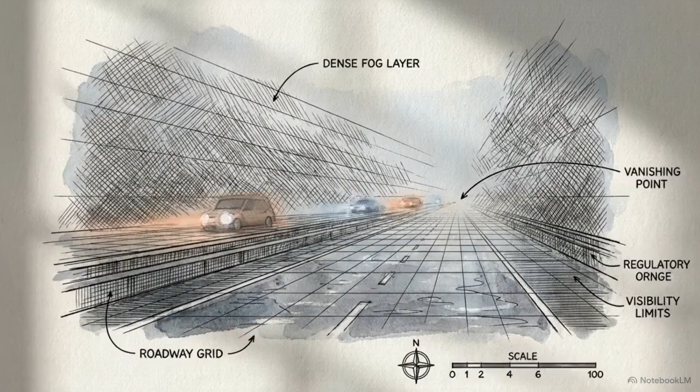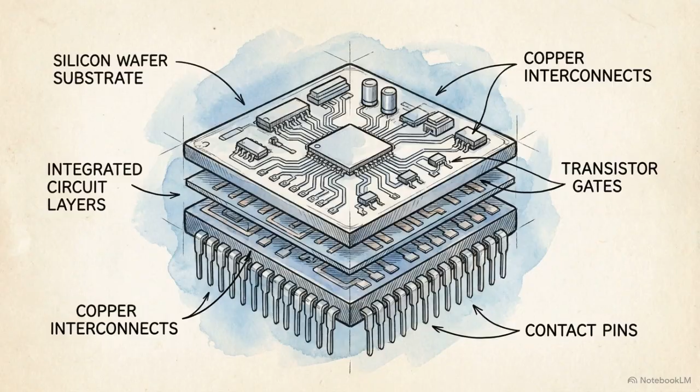For decades, automotive safety standards like ISO 26262 operated under a strict binary. The goal was to prevent hardware degradation and eliminate software bugs. If the components didn't break, the car was safe.

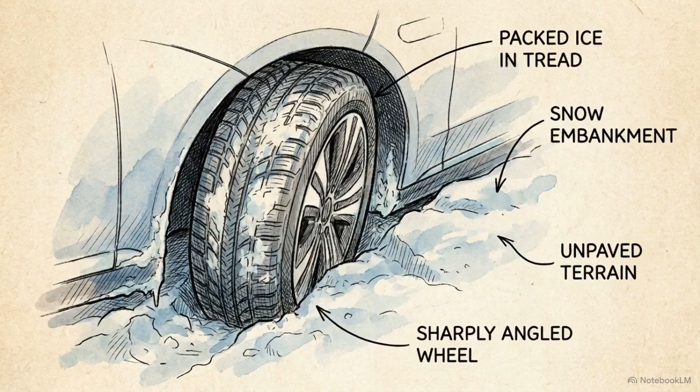Modern autonomous driving systems face a paradox that breaks this model. A vehicle can execute its code perfectly, using flawless sensors, and still crash simply because environmental conditions overwhelm its capacity to perceive the road. Engineers classify this as performance insufficiency. The catastrophic failure originates not from a mechanical defect, but from the limits of the machine's ability to interpret a chaotic physical world.

To address this specific blind spot, the industry developed ISO 21448, widely known as SOTIF, the safety of the intended functionality. SOTIF provides a rigorous engineering framework to identify unknown operational hazards and systematically bring them under control. Engineering for the physical world requires a focus on mapping and controlling external chaos. The baseline for safety has moved from the prevention of broken parts toward the management of environmental variables.

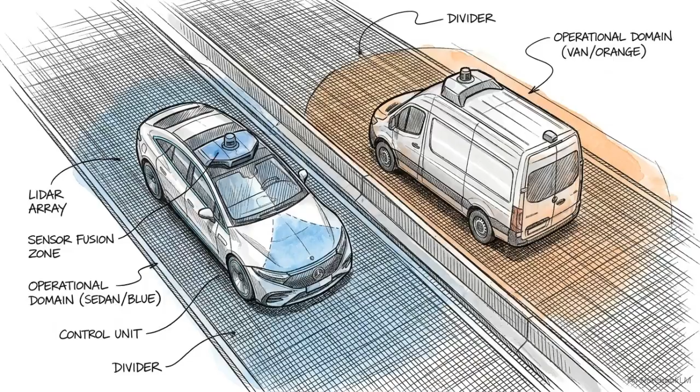The conflict plays out across three distinct layers: the physical hardware, the algorithmic logic, and the interface. Autonomous reliability emerges from this dialectic. A vehicle needs mechanical ambition to push forward, balanced by programmed humility to know when to stop.

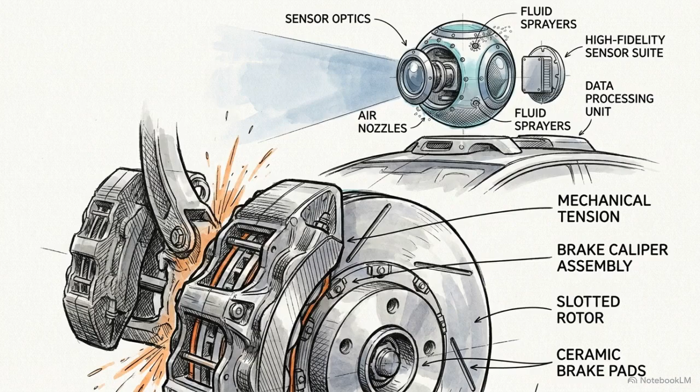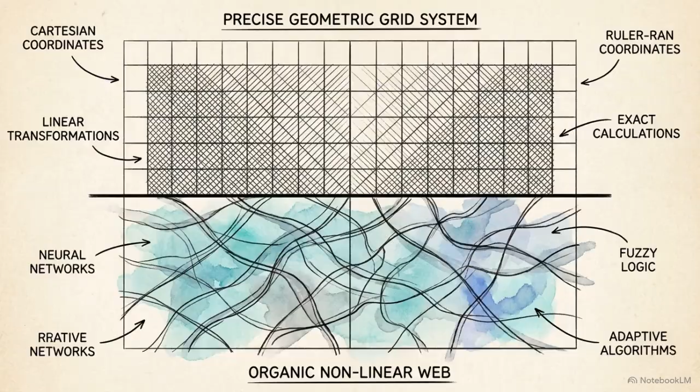At the physical layer, the most immediate threat is lens occlusion. Mud, snow, and road salt act as triggering conditions that corrupt data integrity long before it reaches the perception algorithm. To diagnose this occlusion, Clause 8.3.2 explicitly favors classical edge detection algorithms over modern deep learning. Neural networks can output unpredictable results when presented with unfamiliar types of dirt, but edge detection relies on deterministic physics.

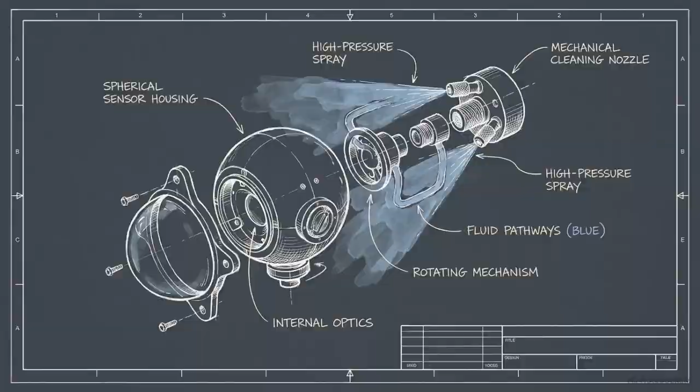Once diagnosed, the system executes an offensive 8.3.2 hardware modification. It deploys active interventions, like Valeo's centrifugal spinning lenses or piezoelectric air jets that blast away water while simultaneously cooling the high-resolution sensors. However, hardware alone cannot solve algorithmic hallucinations.

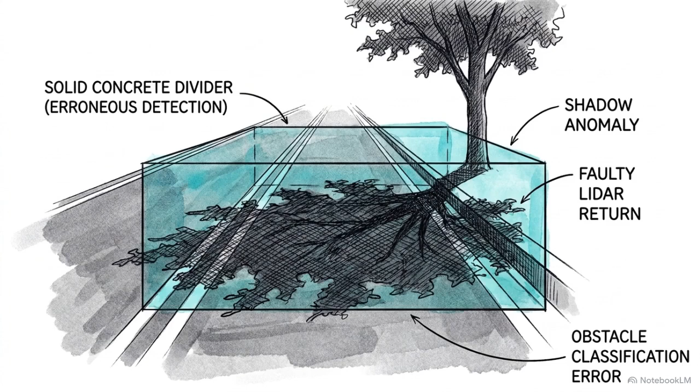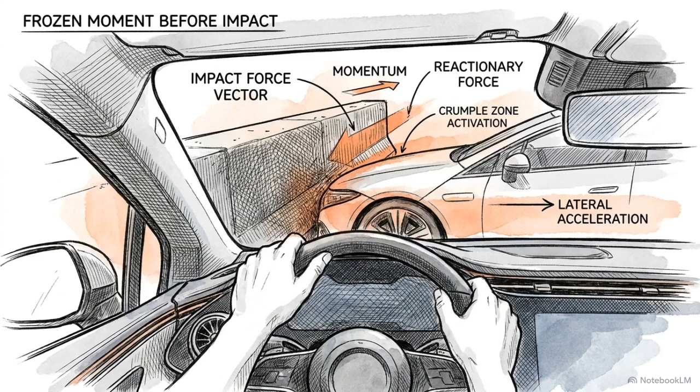Clause 8.3.3 must account for situations where a clean perception system confidently identifies a shadow as a solid concrete divider. This generates a false positive driving command. If a lane-keeping assist system misreads the road and possesses absolute physical authority, it will violently steer the car into a barrier. This cross-section of a steering column illustrates the defensive restriction.

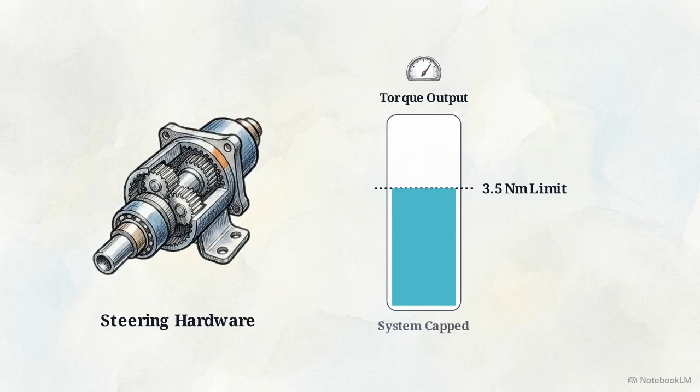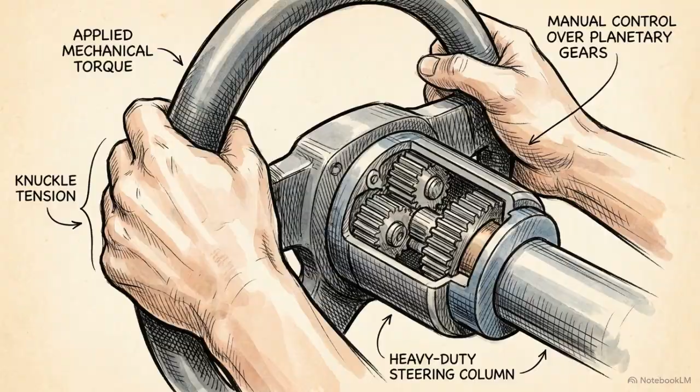Engineers hard-code a strict mechanical limit, capping the maximum automated steering torque at approximately 3.5 Newton-meters. This specific torque ceiling ensures that an adult driver can effortlessly overpower the machine. When the camera's confidence score drops, the system physically degrades its own steering authority to protect the driver.

At the hardware layer, the vehicle forcefully clears its vision to fight the environment, while intentionally capping its mechanical muscles to mitigate its own errors. Moving deeper into the algorithmic layer, SOTIF addresses the risks of relying entirely on black box deep learning models. Convolutional neural networks are highly capable, but their vulnerability to data bias makes them prone to unpredictable edge case failures.

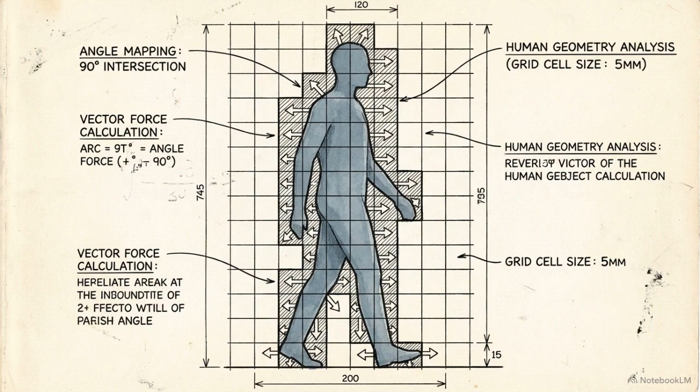To counter this, Clause 8.3.2 dictates a hybrid architecture. Engineers pair these advanced neural networks with a much older tool, the histogram of oriented gradients, or HOG. HOG calculates simple geometric shapes. By running it in parallel with deep learning, it provides an explainable, shape-based cross-check for high-risk safety protocols, like emergency braking, verifying the primary network's decisions.

This 3D topographical map displays another 8.3.2 algorithmic modification: predictive environmental modeling. The system combines GPS coordinates, time data, and astronomical ephemeris charts to calculate the exact moment a sun glare vector will intersect the camera's trajectory. Armed with this prediction, the vehicle adjusts its camera exposure or shifts its data reliance to radar and LiDAR before the sunlight ever hits the lens.

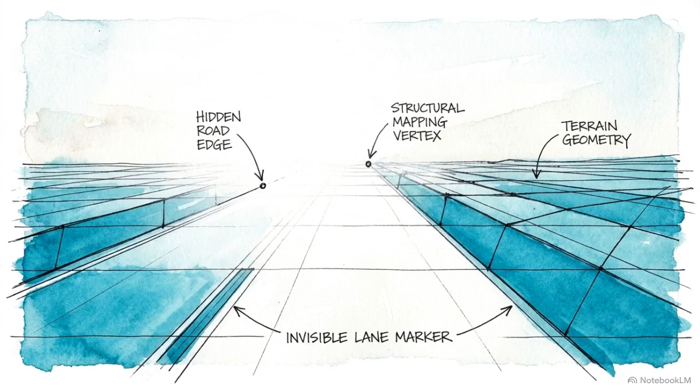Yet predictive modeling has limits. Clause 8.3.3 steps in for scenarios that cannot be out-computed. Torrential rain scatters LiDAR lasers and distorts camera pixels simultaneously, rendering offensive algorithms useless. The required response is dynamic ODD reduction. When sensor data degrades past a mathematical threshold, the system enforces the ultimate restriction.

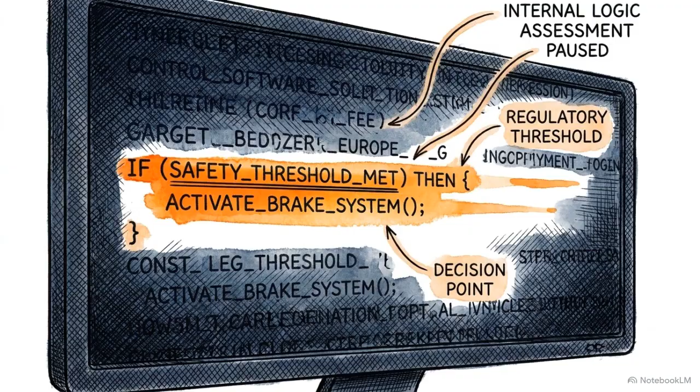Fleet operators execute this in real time. When specific precipitation or visibility metrics are crossed, robotaxi services actively ground their fleets or route active vehicles immediately to safe harbor. The software must aggressively predict failure and cross-examine its logic, but it must also retain the architectural discipline to shut the service down when nature wins.

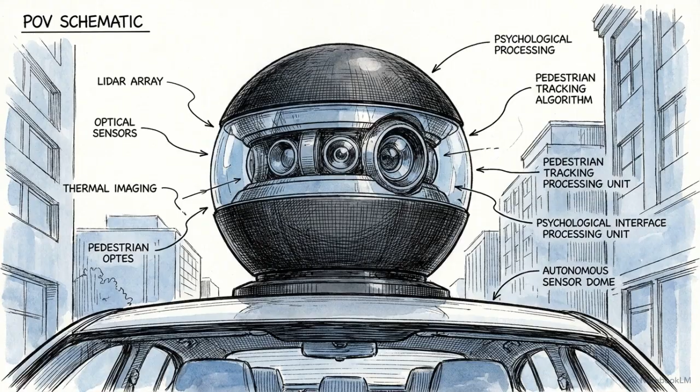The SOTIF framework extends beyond the internal logic of the vehicle. It governs the psychological interaction between the autonomous system and external actors, like pedestrians and law enforcement. Clause 8.3.2 requires conspicuousness to manage this interface. Mercedes-Benz achieves this by deploying turquoise marker lights. This distinct color explicitly broadcasts to surrounding traffic that the vehicle is in an active Level 3 eyes-off state, reducing human unpredictability. To prevent pedestrians from misinterpreting a silent electric vehicle, engineers deploy acoustic vehicle alerting systems, or AVAS, as an auditory interface.

These acoustic signatures are heavily engineered. Collaborating with composers, manufacturers build soundscapes that intuitively communicate the vehicle's mass and acceleration to anyone nearby.

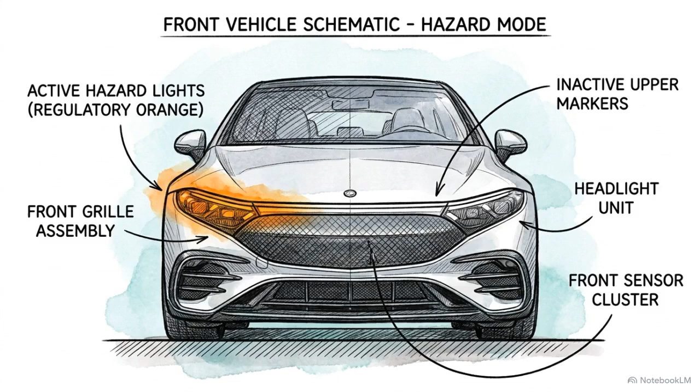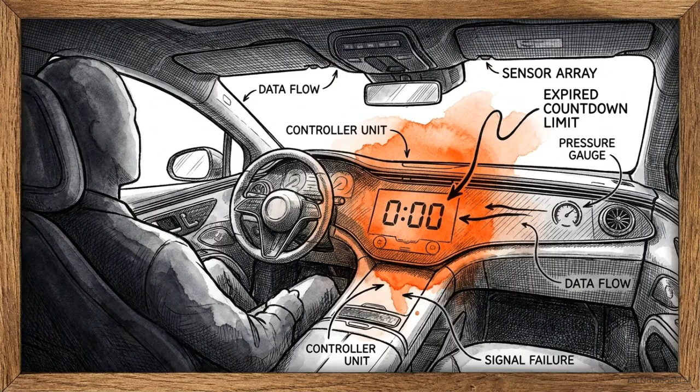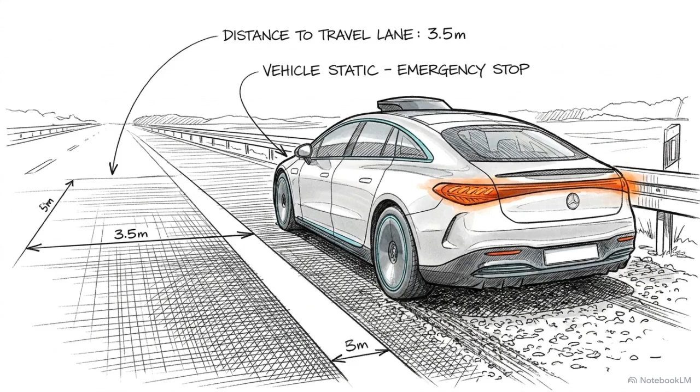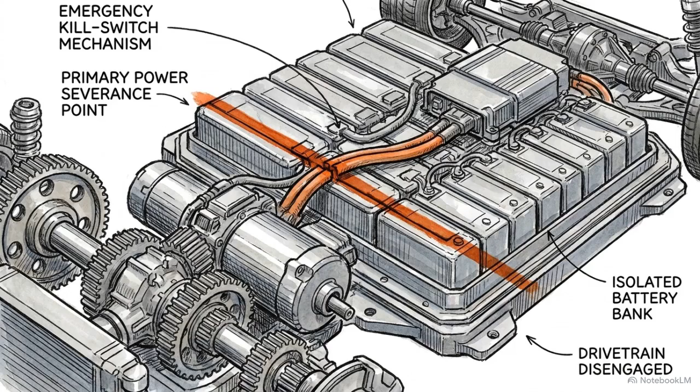If the human fails to respond and the timer expires, the protocol triggers the minimum risk maneuver, or MRM. The vehicle autonomously halts in its lane or moves to the shoulder, reducing its kinetic energy to absolute zero. The system uses lights and sounds to broadcast its competence to the world, but it relies on an uncompromising timed kill switch to shut down entirely if the human link fails.

This matrix synthesizes the opposing strategies. On the left, we map the aggressive expansion measures of Clause 8.3.2: active sensor cleaning, hybrid algorithms, and turquoise lighting. On the right, we map the rigid restrictions of Clause 8.3.3: physical torque limits, dynamic ODD reductions, and the MRM protocol. Executing only the left side creates extreme danger.

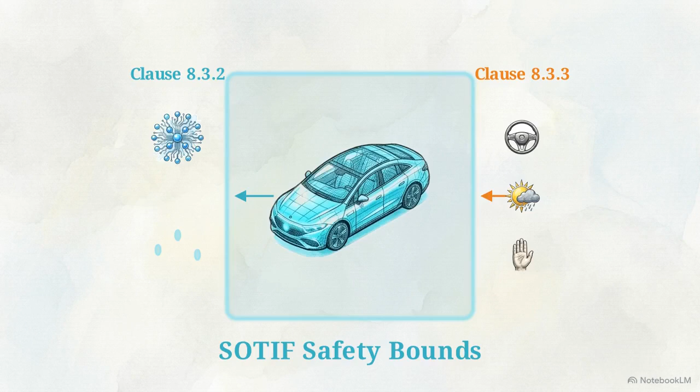Pushing performance expansion without limits results in unverifiable code complexity and massive SOTIF risks on public roads. Relying solely on the right side creates commercial failure. An overloaded system refuses to drive, destroying product utility. True compliance requires balancing these opposing forces. The mathematical equilibrium between expanding capability and restricting authority establishes the SOTIF safety bounds. Advanced autonomous engineering generates safety by expanding system capability while precisely orchestrating its own mechanical and logical limitations.